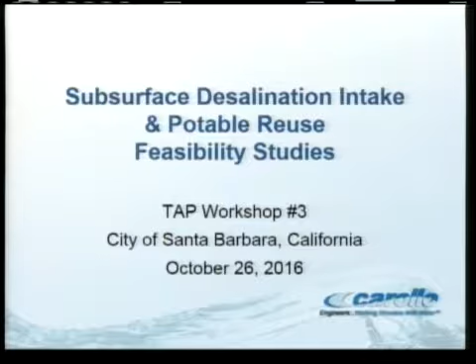Madam Chair, Joshua Haggmark, Water Resources Manager. We have roughly 60 slides for you today, trying to summarize as concisely as we can the data put together as part of TM3. We'll start with a summary of the background and objectives of the study, a reminder of how this fits into the bigger picture of looking at both subsurface and potable reuse. We'll provide a summary on the subsurface intake feasibility and then dive into our potable reuse study.

This got kicked off in September of 2014 at a meeting with our city council. They were interested in, as part of reactivation of the desal facility, having us study what it would take—feasibility, cost, and timeline—associated with converting the offshore facility to a subsurface intake, and look at the options for potable reuse. This kicked off the discussion and ultimately became part of our requirements under our regional board permit amendment. This scope identifies feasible alternatives, however is not determining the most feasible or best alternative.

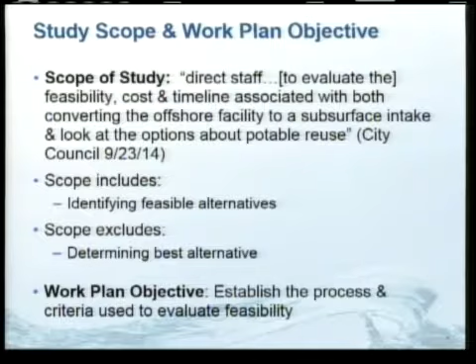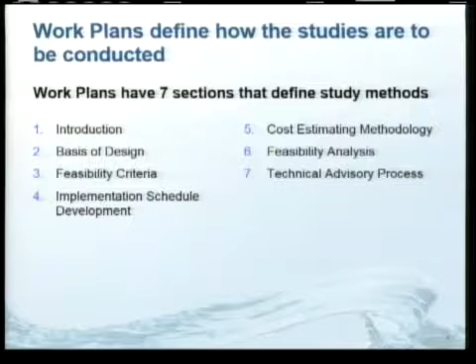The work plan objectives establish the process, and we have a schedule for the work plan. When we went through it, there were 7 sections; I'm not going to go through all of those now, but the point is we wanted a fully vetted public process for getting input on this, and it was ultimately approved by the regional board staff, forming the framework for the feasibility study.

Our workshop number 1, which was creation of the work plan, was completed in August of 2015. Workshop number 2 was in January of 2016. Today's workshop number 3, and we do not believe at this time there will be a need for workshop number 4. We now have a date with the regional board to provide them a summary of all the information we've completed here. That's now May 11th and 12th. Unfortunately we couldn't get that in Santa Barbara, so it's going to be in San Luis Obispo.

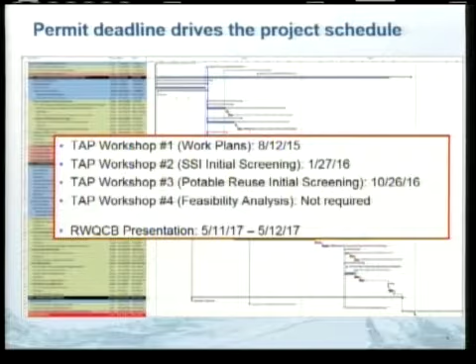So just wanted to recap on where we were with workshop number 2. On January 27th we held that public workshop, and we continued to take public comments up until February 11th. We responded to all of those comments and put that together on the NWRI website, making it publicly available. The technical advisory panel went above and beyond and also responded to the public's comments, posted to the website on May 12th. The final report, with all comments incorporated, was posted on October 11th, 2016.

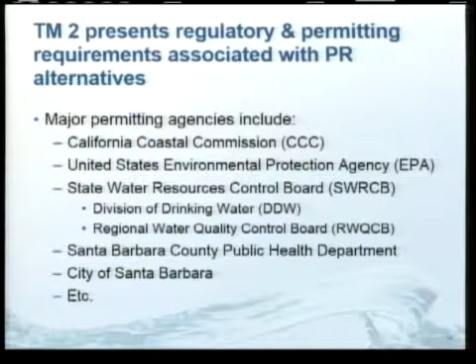In Tech Memo 2, we identify the major permitting agencies. We discuss the two types of potable reuse: indirect potable reuse, IPR, and direct potable reuse, DPR. With indirect potable reuse, this is basically advanced treating the wastewater, ATW, advanced treated water, and introducing that into an environmental buffer, such as a surface water body or a groundwater aquifer. This type of potable reuse is regulated by Title 22, which calls this groundwater replenishment, GWR, and refers to it as surface application. The next type of groundwater replenishment is subsurface application, using injection wells.

With direct potable reuse, there are two types. There is raw water, RW, supply augmentation, which is introducing the advanced treated water upstream of a drinking water treatment facility without an environmental buffer. So that's the direct versus indirect distinction: indirect potable reuse has an environmental buffer, such as travel time in a reservoir or in a groundwater body, while direct potable reuse has no environmental buffer and is introduced upstream of a drinking water facility.

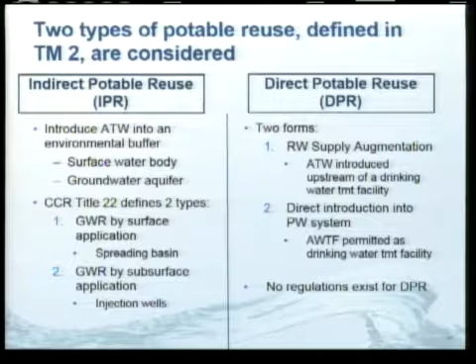The next type of direct potable reuse is introducing the water directly into the potable water system. Here the advanced water treatment facility would be permitted as a drinking water plant. There are currently no regulations in California for direct potable reuse. The state board has, however, recently issued guidelines or recommendations for how to regulate direct potable reuse, but still, to this point, there are no regulations governing direct potable reuse.

Wanted to highlight briefly some requirements for IPR treatment requirements that are stated in Title 22. Here we break them up again by the type of application, starting with groundwater replenishment by surface application.

At minimum, surface application requires tertiary treatment. That's this top process flow diagram, where secondary effluent coming off the wastewater plant would be filtered and disinfected before being sent to the surface application, like a spreading basin.

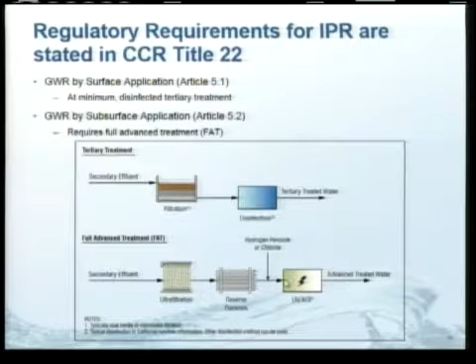The next type would be subsurface application, groundwater replenishment by subsurface application, and that requires what's referred to as full advanced treatment, FAT. That involves treating the secondary effluent coming off the wastewater plant using membrane filtration, ultrafiltration, reverse osmosis, and then an advanced oxidation process.

Significant with indirect potable reuse, as I mentioned before, is this concept of travel time. The travel time requirement varies by application, surface or subsurface, and also by the calculation method that's used.

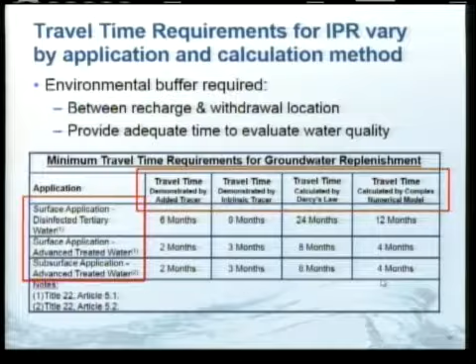As we said, the regulatory status for direct potable reuse continues to evolve. California has just not adopted any standards for this yet. The guidelines have been published and are a starting point that we use to inform this study.

Direct potable reuse projects will likely incorporate this term, log reduction, in excess of Title 22 requirements. Log reduction, for the lay people in the audience, is reducing a concentration by a factor of 10 each time you treat.

14 log would be basically 14 factors of 10 reduction of enteric virus, 12 log reduction of Giardia, and 12 log reduction of Cryptosporidium. Direct potable reuse projects will likely be required to incorporate additional treatment barriers for trace pollutants, as well as enhanced monitoring for pathogen removal and these trace contaminants.

Because there is no environmental buffer, there's going to be an engineered storage requirement that allows each key process to be monitored so that the quality can be verified before distribution. The engineered storage time will be based upon this failure and response time: how long it takes to analyze for the contaminant, and how long it takes to respond to notification of that failure. That's how the engineered storage will be designed.

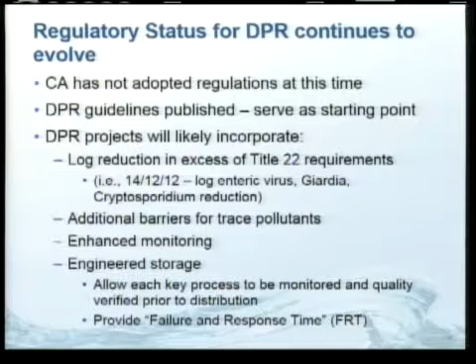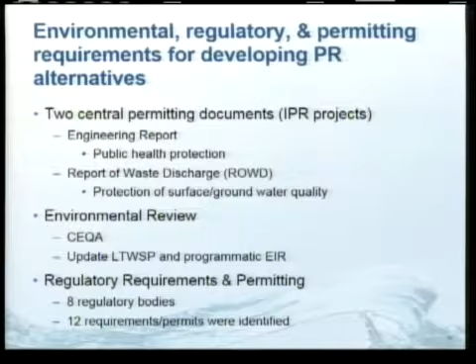Moving on past this technical feasibility screening, there are actually some other requirements that come in through the regulations in terms of permitting documents, engineering reports, and report of waste discharge requirements. There's an environmental review process; the city would need to update their long-term water supply plan and its programmatic EIR. There are also a lot of regulatory bodies and permitting requirements that would need to be addressed. Tech Memo 2 talks about all of this and the time required to get through that process.

With that, I'm going to turn it over to Eric.

Thanks, Tom. Madam Chair, Eric Cheresia with Carollo Engineers. I'm going to briefly start by going over the basis of design for technical feasibility that was used as part of this study. The basis of design for technical feasibility is determined by several factors, including the potable reuse application, indirect versus direct potable reuse, water quality and treatment needs, and the treated water production capacity.

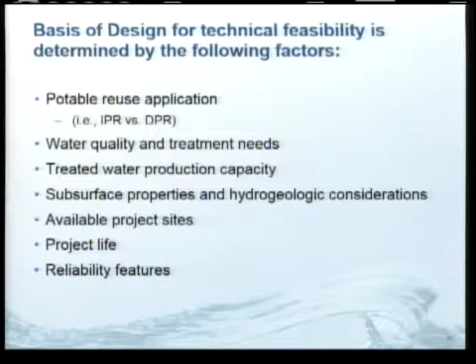For IPR alternatives, we also need to consider subsurface properties and hydrogeologic considerations. We must evaluate available project sites, project life, and reliability features. You can refer to TM3, where there are complete write-ups for each of these basis of design considerations, but I'm going to talk you through some of the major ones.

For potable reuse applications, we considered groundwater replenishment by both surface and subsurface applications in the Foothill Basin and Storage Unit 1.

For direct potable reuse alternatives, we considered raw water supply augmentation to three places. First, we looked at augmenting the Cater Water Treatment Plant and sending advanced treated water to the Lauro Reservoir. We also looked at dilution at the Charles Meyer Desalination Plant to lower salinity and treat it there. And we also looked at creating a new water treatment plant, a membrane plant that would treat advanced treated water and then go into the distribution system.

Tom touched on regulations associated with water quality and treatment requirements. For IPR, our groundwater replenishment by surface application or spreading, we considered tertiary treated water. For groundwater replenishment by subsurface application, as required in the regulations, we considered a full advanced treatment train.

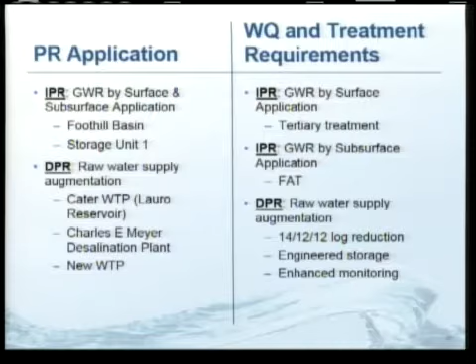Using the assumptions Tom mentioned for direct potable reuse in our raw water supply augmentation schemes, we assumed a 14-12-12 log reduction. We considered engineered storage with 4 hours of storage time, and we also incorporated enhanced monitoring systems in the process.

The target production capacity is specified in the work plans, which were approved in Workshop 1. The yield was based on the city's permitted desalination plant capacity, which is 10,000 acre-feet a year. However, it's important to note that the city also produces 1,400 acre-feet a year of non-potable reuse water. Since this is already considered in the city's water supply portfolio, any of these potable reuse alternatives cannot impact this non-potable reuse production. So taking that into consideration, for all of our alternatives, the combined potable reuse and non-potable reuse production capacity must be the summation, which is 11,400 acre-feet a year.

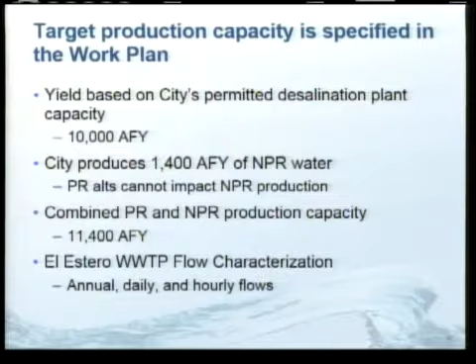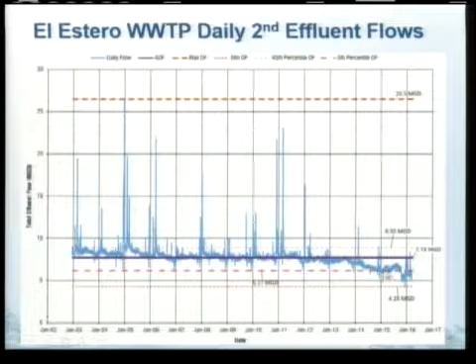To look at how much wastewater was available from the city's El Estero wastewater treatment plant, we did a flow characterization where we looked at annual, daily, and hourly flows over a historical time frame. This graph shows the El Estero wastewater treatment plant daily secondary effluent flows from January 2003 until January 2016. You'll note there's a range of flows from a minimum of 4.25 million gallons per day, or MGD, to a maximum of 26.5 MGD. However, the average is pretty consistent, and the average daily flow was noted at 7.73 MGD.

I'd like to point out, in recent years, due to the historic drought that Joshua mentioned in the introduction, the effluent flows have actually shown a pretty steady decline. However, for our study, to design our facilities, we used the average daily flow over that 13-year period.

To give an idea of the treatment facility design, it's important when designing a facility to not have any stranded assets. You don't want to build the facility too large where you're stranding your assets, and you don't want to build it too small so that you're wasting any water.

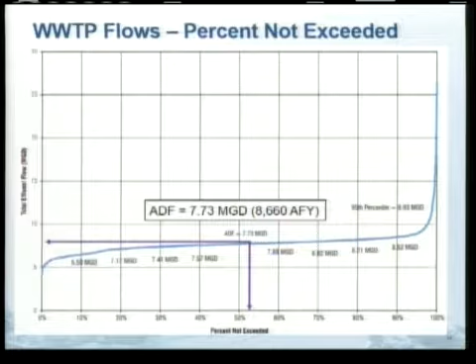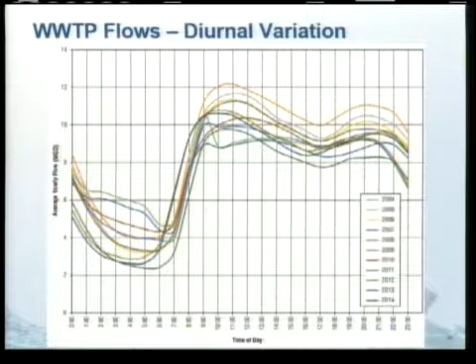It's also important to consider that the wastewater treatment plant flows are diurnal in nature, fluctuating throughout the time of day. This graph shows hourly flows over that same period, and you can see the diurnal variation here. We did an analysis based on this diurnal variation to determine the equalization storage needed for the advanced water treatment facility, because the membrane processes, the reverse osmosis systems, can't accept a variation in flow. They must have a steady flow, so you must equalize the flow coming in with storage.

Based on calculations, we determined that equalization storage of 1.5 million gallons was necessary.

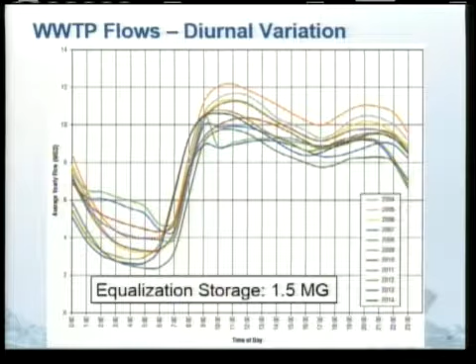Going back to the indirect potable reuse alternatives, it was important to consider subsurface and hydrogeologic properties. These were determined basically by two methods: literature review of existing data for the area, and evaluation of analysis inputs from the Santa Barbara draft flow and transport model, developed by the USGS, which I'll touch on in greater detail later in the presentation. This is how we were able to obtain certain characteristics like injection rates, percolation volumes, and groundwater recharge and discharge rates.

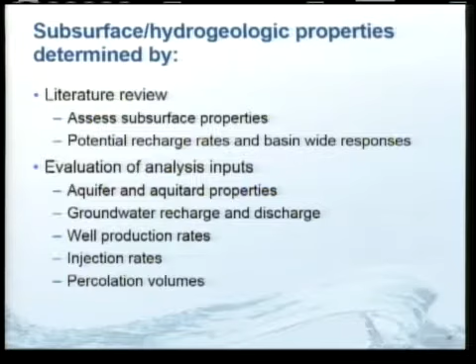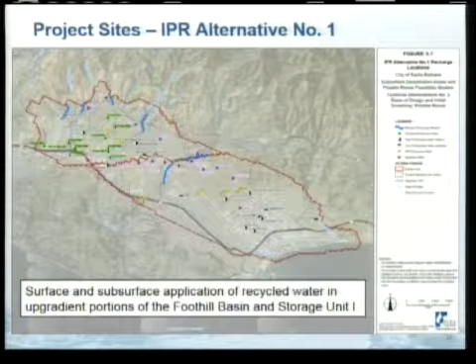Looking deeper into the IPR alternatives, we considered two indirect potable reuse alternatives. This figure shows an overview of IPR alternative number 1, in which surface and subsurface applications, spreading and injection wells, apply advanced treated recycled water in the upgradient portions of the foothill basin and in storage unit 1. This figure shows the locations of the conceptual private production wells, the added IPR recovery wells, and the injection wells. I'd urge anyone to look deeper at this figure and the explanations in TM3.

Additionally, we considered IPR alternative number 2, the subsurface application or injection of recycled water to create a seawater intrusion barrier, shown here along East Cabrillo Boulevard. It was determined through our analysis that even with 24 wells, the barrier was ineffective at preventing seawater intrusion, so it was discounted from further study.

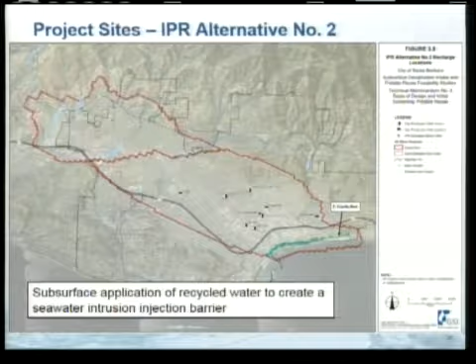With that, I'll dive into detail about the hydrogeologic modeling analysis performed to look deeper at the IPR alternatives. Central to the evaluation approach was the use of the draft Santa Barbara groundwater flow and transport model, prepared by the USGS and developed for the city's long-term water supply program. Our key analysis involved an iterative approach for both implementation approaches, where we increased groundwater replenishment rates with and without IPR recovery pumping until certain constraints couldn't be met. These constraints include the travel time requirements mentioned previously, along with various other constraints such as creating artesian conditions, all laid out in TM3.

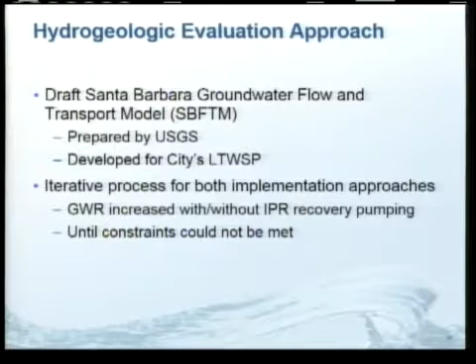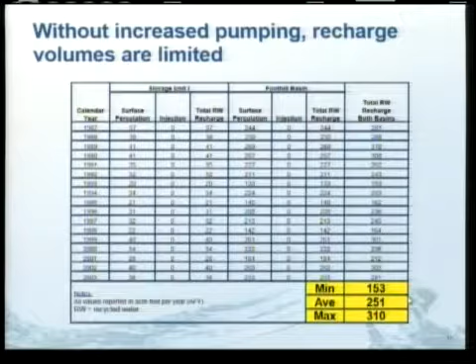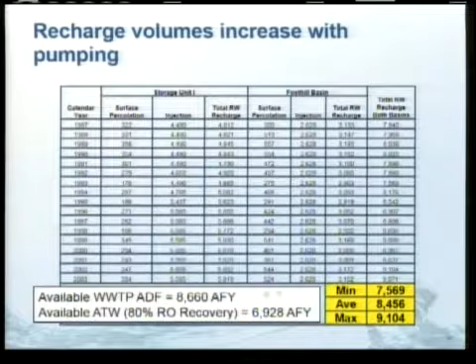Bringing that back to our wastewater treatment analysis, the available amount, as mentioned previously, was 8,660. The membrane process, the RO process used to advanced treat the water, uses an RO system that we assumed an 80% recovery for. So we only have about 6,928 acre-feet a year to inject.

Bringing the modeling further, we also evaluated other impacts, such as the impact to sensitive habitats and shallow groundwater contamination. It was found that groundwater replenishment by surface application had the potential to increase groundwater levels that would impact sensitive vegetation, could create riparian or wetland areas, and could also cause changes in water quality in existing areas. A good amount of the recharge areas analyzed in the study were coincident with sensitive habitat areas.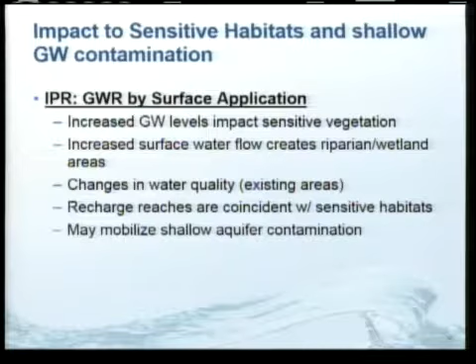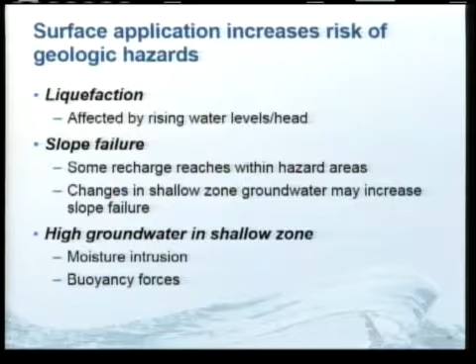Furthermore, it's noted that groundwater replenishment by surface application may mobilize shallow aquifer contamination. Additionally, surface application could increase the risk of geologic hazards, such as liquefaction, which are affected by rising water levels and head. Some of the reaches used for surface application were coincident with hazard areas, which may cause slope failure. Finally, the higher groundwater that would result from surface application in the shallow zone could cause moisture intrusion in foundations and could increase buoyancy forces that could affect some of the structures built in those areas.

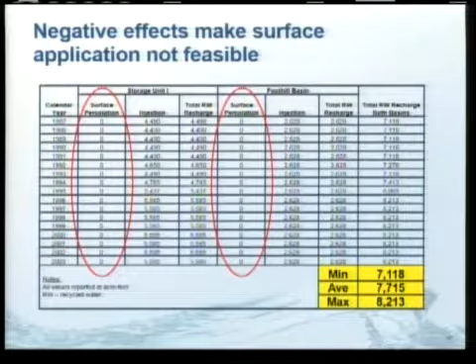So the negative effects just mentioned made surface application not feasible. This table presents an updated modeling analysis that we performed in which we did not use surface application. You'll note that the total recycled water recharge to both basins averaged about 7,715 acre-feet a year. Bringing back to the available recycled water that could be used for IPR of 6,928, it was determined that all of this water could be brought forward for an IPR process.

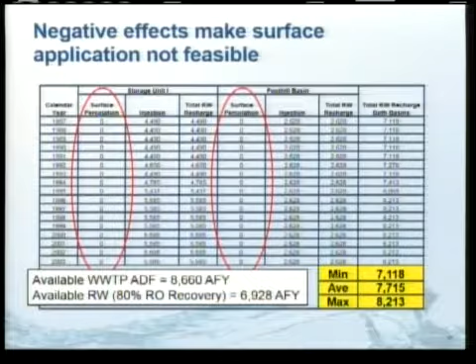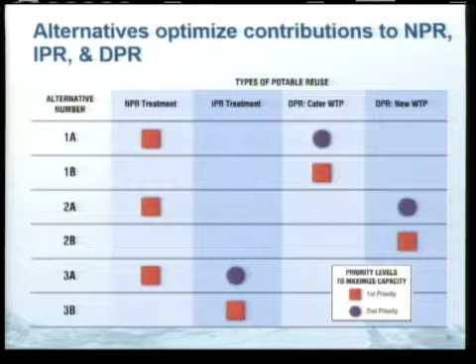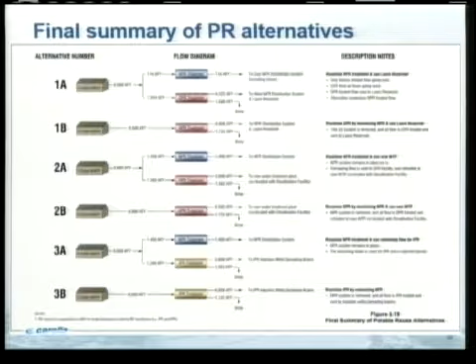So now I'd like to draw your attention to our final summary of potable reuse alternatives. This is a handout, so if everyone could pull this out, I'm going to talk through one of the alternatives, Alternative 1A, to give an idea of how to read this figure.

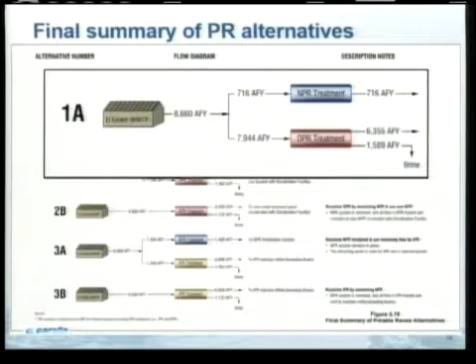Starting with Alternative 1A, the El Estero wastewater treatment plant produces an average daily flow of 8,660 acre-feet a year. Remember that Alternative 1A maximizes NPR treatment first, so 716 acre-feet a year, the eastern flow of NPR currently planned for, goes to an NPR treatment system with 100% recovery, then to the east NPR distribution system, which includes future flows. The remainder, 7,944 acre-feet, goes to a DPR treatment train.

As mentioned previously, that DPR process is 80% efficient. So 80% of that flow becomes advanced treated water and goes to the west NPR distribution system, used to transmit the water to the Laurel Reservoir to ultimately be retreated at the Cater Water Treatment Plant. The remaining 20% is brine and must be disposed of.

The description notes section of this figure summarizes in words that this option maximizes NPR treatment and uses the Laurel Reservoir, where only tertiary treated flows are going east. However, all flows going west are DPR treated and sent to Laurel Reservoir.

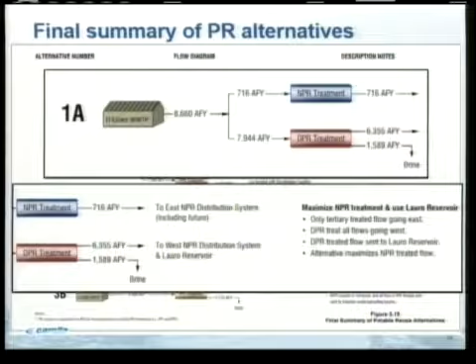You'll notice that among the alternatives we mentioned, we were also considering dilution of the intake at the Charles Meyer Desalination Plant. However, this was discounted after an initial analysis. The recovery of the desalination plant remains unchanged, so the intake water salinity at capacity only decreased from 34,000 to 25,000 milligrams per liter, which wasn't in the range where an alternative process could increase recovery. So the recovery of the plant still remained at 45%, which translates to a 55% loss of AWTF product water.

So it was found that better utilization of the wastewater treatment effluent would be had by reusing the Cater Water Treatment Plant or constructing a new water treatment plant.

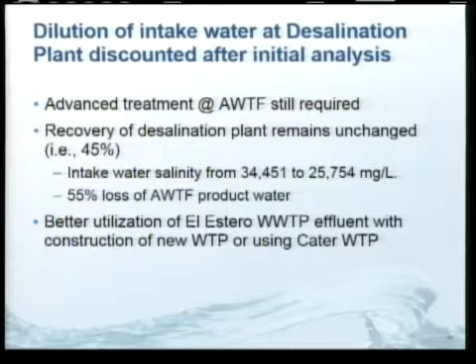Next, I'm going to go into the details of the treatment processes that were selected for the potable reuse study.

As mentioned previously, the city currently practices non-potable reuse, or NPR, and the secondary effluent is treated with microfiltration and chlorination. For this study, it was assumed that the NPR facilities would be relocated to the annex yard and incorporated into the new indirect potable reuse or direct potable reuse advanced water treatment facility. This would free up space at the Estero wastewater treatment site where it currently is, and would also consolidate the treatment equipment and operations expertise.

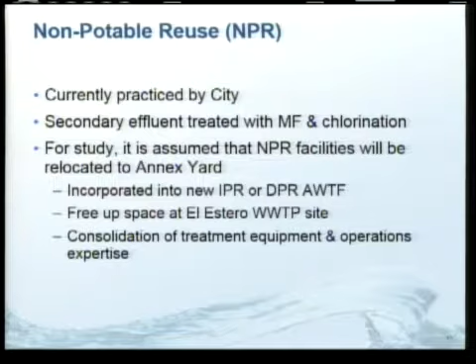As Tom mentioned in the summary of regulations, the indirect potable reuse process is dictated by Title 22 requirements. I'm going to walk through a flow diagram of the IPR process, in which secondary effluent from the El Estero wastewater treatment plant is brought to equalization tanks, designed at 1.5 million gallons as mentioned from our flow characterization, then through a microfiltration system, a two-stage reverse osmosis system, and a UV advanced oxidation process, where the water is ultimately brought to engineered storage, designed for 4 hours of retention time, and then to injection wells or spreading basins.

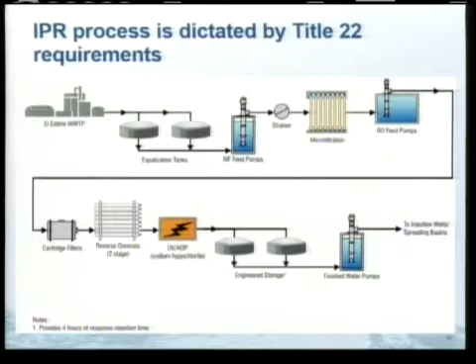The DPR process chosen for this study was based on the most recent regulatory activity and precedents in California. This train is very similar to the one just shown for indirect potable reuse. However, because of the additional treatment requirements expected with DPR, there's an additional disinfection step using ultraviolet in between microfiltration and reverse osmosis. Also, this train has enhanced monitoring systems, online monitors, and that sort of thing included in the design.

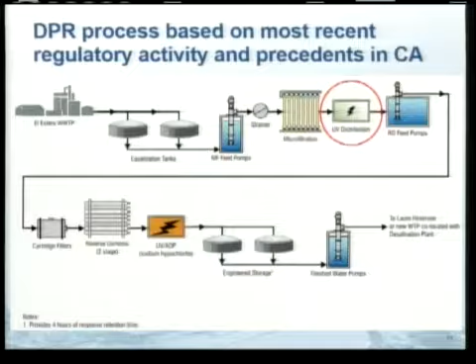So I'm going to walk through the conceptual design summary for all 6 alternatives that I mentioned and their project descriptions.

I'd like to turn your attention to one of the handouts, for alternative 1A. It's a pipeline alignment, and I'm going to walk you through this alternative. Similar figures are given for each of the 6 alternatives, showing the details of the design and any key design considerations.

We'll start at the El Estero wastewater treatment plant, where there's a 16-inch pipeline constructed that goes to the DPR facility. As mentioned previously, this alternative maximizes your non-potable reuse. So this existing east system remains and conveys tertiary treated water. However, the west system is repurposed and already goes to the golf course pump station and reservoir.

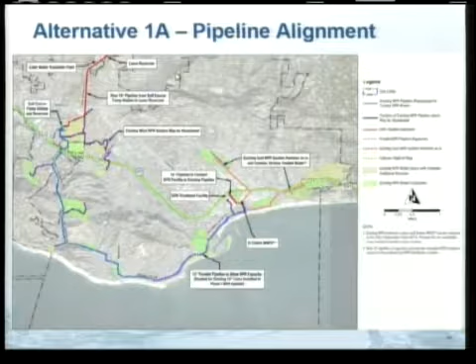A portion of this line is actually a little too small, it's a 12-inch pipeline. So for this stretch, we would have to add a 12-inch parallel pipeline to allow the DPR capacity we've added. But after this, it goes to a 16-inch line and ultimately goes to this area. Then from the golf course pump station and reservoir, we'd add a new 16-inch pipeline that would convey the water to Lauro Canyon or Lauro Reservoir, where it would be retreated at the Cater water treatment plant.

This table presents a summary of the potential maximum yields from each of the alternatives. You'll note that the table splits up your contributions from non-potable reuse, indirect potable reuse, and direct potable reuse, then sums up and gives you the total yield of each of these alternatives.

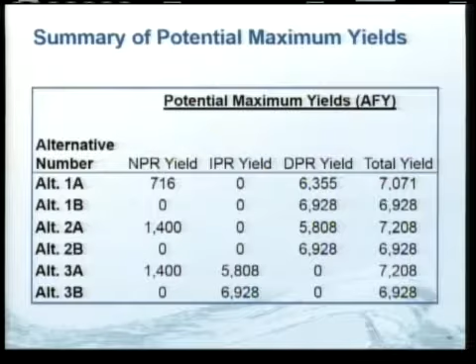Next, I'm going to touch on the conceptual design summary performed for the advanced water treatment facility. You've got in your handout several renderings of the AWTF that was designed and modeled in 3D rendering software, overlaid over a scaled image of the site. I'm going to talk through some of the major processes and try to go in order of how the water would come to the site.

First, from the El Estero wastewater treatment plant, secondary effluent is conveyed to these equalization tanks. Each of these tanks is 1.5 million gallons to provide full redundancy. From the tanks, the water flows to the MF pump station and wet well, where the feed pumps for the microfiltration system pump through the microfiltration system.

Here's the microfiltration system, then it goes to the pre-RO UV system, then is conveyed through cartridge filters and through the reverse osmosis system. After the reverse osmosis system, the water is then conveyed to the UV AOP system and then to the engineered storage tanks, which have been designed to provide a residence time of 4 hours.

Ancillary facilities include a control room, electrical mechanical room, chemical storage and feed area, and a clean-in-place system for the membrane systems.

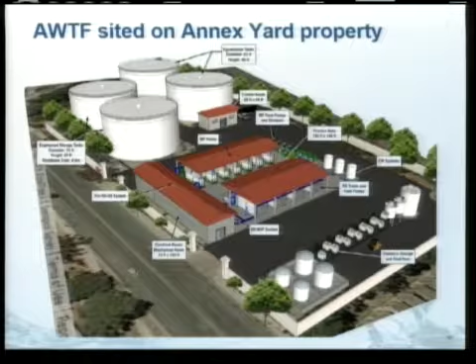With that, I'm going to turn it over to Tom, who's going to highlight the initial screening analysis and provide a summary of the study. Thank you.

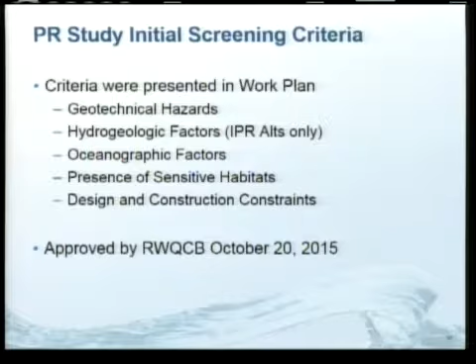The potable reuse initial screening analysis included criteria identified in the work plan, including geotechnical hazards, hydrogeologic factors for the IPR alternatives only, oceanographic factors, tsunami run-up, presence of sensitive habitats, and design and construction constraints. The criteria were included in the work plan that was approved by the regional board.

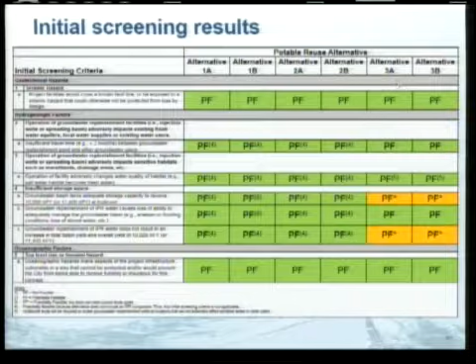Potentially feasible, but not currently meeting the study goals - those are PF stars. When the city updates their long-term water supply plan and wants to change the study goals, those are things that can be addressed through that future update. The two yellow or orange-colored PF stars on this graph relate to the 10,000 acre-foot capacity element, or the 11,400 capacity element, for alternatives 3A and 3B for IPR. That basically means the IPR couldn't receive that quantity of water.

On the next page, we have the screening criteria for sensitive habitats and also design and construction issues. Here again, we see the 10,000 acre foot popping up. This is on the production side, as opposed to the hydrogeologic factors being the groundwater basin not being able to receive them. So none of the alternatives met the production goal for 10,000 acre foot. But again, when the city updates their long-term water supply plan, the studies identified a lot of good information that can be used, and that 10,000 acre foot criteria could be adjusted in the future.

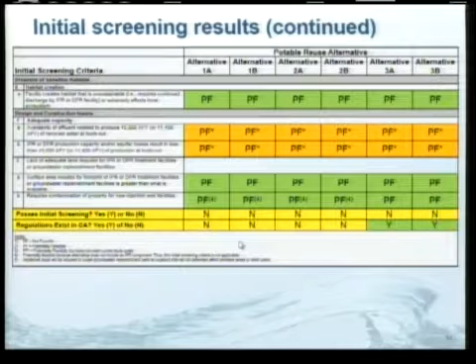So none of the alternatives pass the technical feasibility screening process. We've also presented here whether or not there were regulations governing the process. For the direct potable reuse alternatives, 1A or alternatives 1 and 2, there are no regulations for direct potable reuse yet.

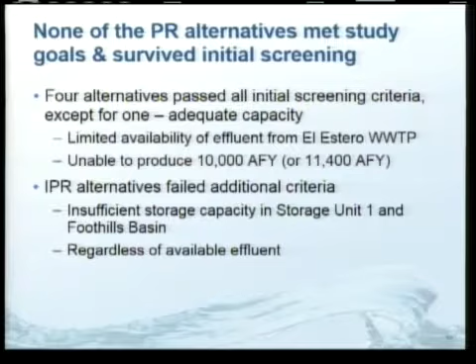So in summary, none of the potable reuse alternatives met the study goals and survived this initial screening process. Four of the alternatives passed all screening criteria except that they were limited by the availability of effluent from El Estero to produce the 10,000 or 11,400 acre-foot production goal. The IPR alternatives also failed additional criteria related to whether the groundwater basins could receive that much water. So any alternative carried forward in the long-term water supply plan that might include IPR would need other supply options to add up to 10,000 acre-feet ultimately.

We wanted to point out several alternatives that were discounted from further study before the initial screening process, including use of advanced treated product water for diluting intake water at the Charles Meyer desal plant. That was because the dilution was not significant enough to change the recovery rate of that process and would result in a large loss of this advanced treated wastewater.

There was an IPR alternative 2 discussed in Tech Memo 3 related to creating a seawater intrusion barrier, and the hydrologic modeling that USGS conducted, which GSI was also working with, showed that the seawater intrusion barrier was not effective.

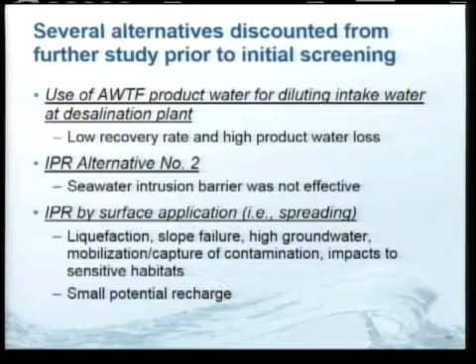IPR by surface application was also discounted, as Eric had summarized, because of potential hazards created by liquefaction and slope failure due to high groundwater levels. There's also potential to mobilize groundwater contamination in areas where surface spreading zones were interconnected with surficial groundwater areas, so it wouldn't only be recharging the lower production zone where the city's wells produce from. There's an upper confined aquifer with known contamination that could be mobilized, as well as impacts to sensitive habitats.

So I'll turn it back to Joshua. Okay, just wanted to wrap up here and summarize. This wasn't a wasted effort. There was a lot of information gathered here that I think is going to be invaluable to the city's long-term water supply plan update.

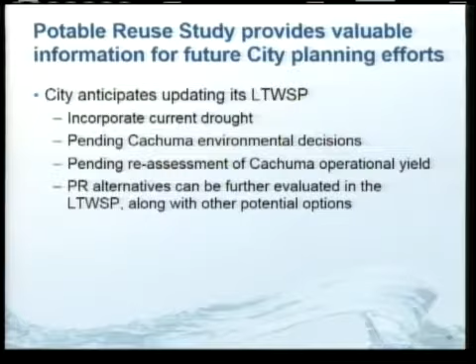And unfortunately, we do have to wait. We are in an emergency right now. Doing planning during an emergency is awfully difficult. Staff are spread thin, and it's difficult to know what exactly we're planning for when we're still trying to deal with an emergency. Concluding this drought, and hopefully it will end soon, will allow us to reassess where we stand with our surface water supplies, which we know are changing dramatically, potentially with a new drought of record.

And so we're also waiting to see how the biological opinion comes out for Cachuma, and potentially that could have adverse impacts on supplies from Cachuma as well, and also reassessing the operational yield from the Cachuma project. We expect that could go down dramatically. So when we begin the long-term water supply plan, we will know exactly what volume we are looking for from this new supply. I think that would allow us to be much more surgical, using this data and assessing what we need, whether from desal or potable reuse, and how we might move forward.

So with that, that concludes our presentation.